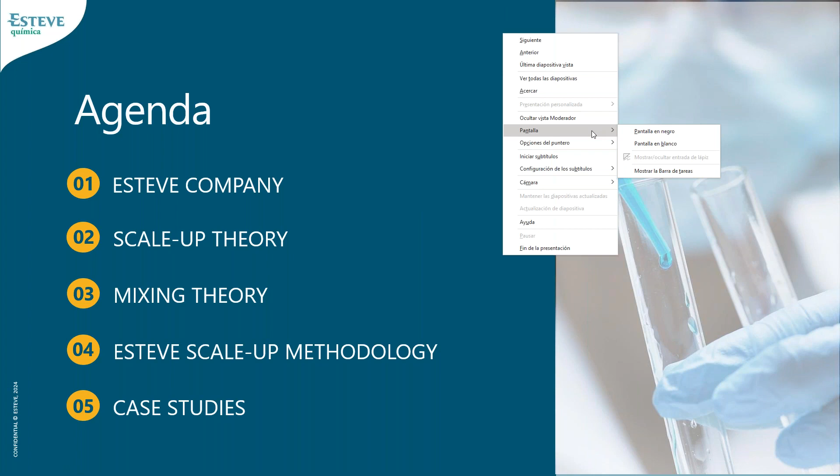Well, the agenda we will follow today is this one. I will start talking about the Esteve company, to then give you some details of scale-up theory, but focusing more in mixing theory, to then present the scale-up methodology that we follow in Esteve, and some case studies to finish this session.

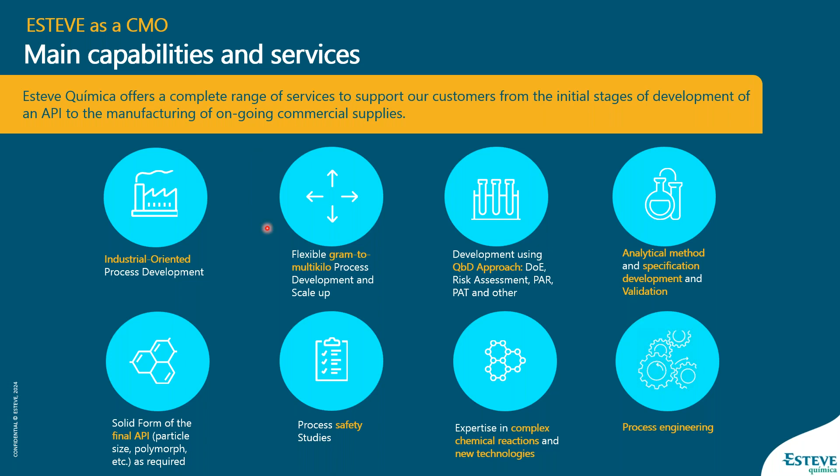So Esteve company was founded in 1929, and it's an international company based in Barcelona. It has two main groups, which is Esteve Pharma and Esteve CMO. I'm involved in the CMO sector, so today we'll talk about this sector, which is focused on the production of active pharmaceutical ingredients. So we support our customers from initial stage of development until the final commercial production. We have different capabilities and services, but today we'll focus on process engineering.

We have the headquarters located in Barcelona and also the R&D facilities. And then we have five production plants around the world, 3 in Catalonia, Spain, 1 in Mexico, and the other in China. With a total number of reactors around 250, which gives us a total reaction volume around 1,000 cubic meters, distributed in the 5 plants.

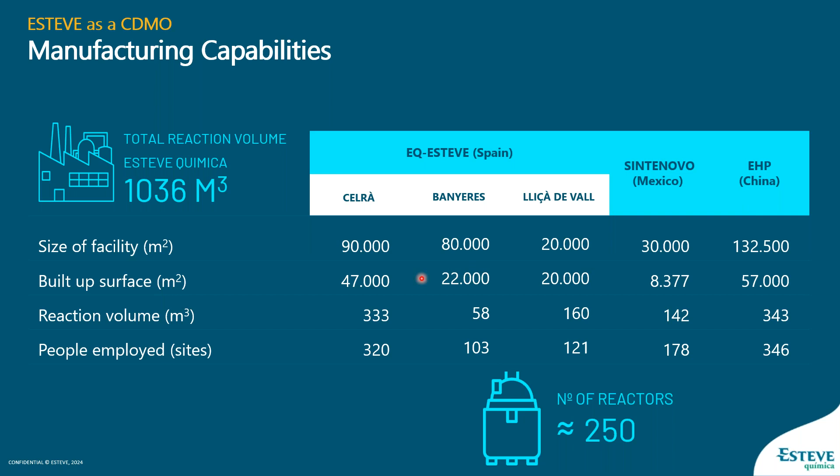And having this picture, I move to the scale-up theory, but keeping the same picture of the reaction volume and the number of reactors, because as a CMO, we require multipurpose plants in order to fit all these different projects that we have at the same time, and each project may be in a different stage in terms of quantities, but also in different stages of the clinical and chemical development, different chemical requirements in terms of the reactor specifications. And this leads to a very difficult plant schedule. And the big problem here is that this plant schedule is being constantly updated due to projects unexpected events, and one delay of one project usually impacts other project schedules.

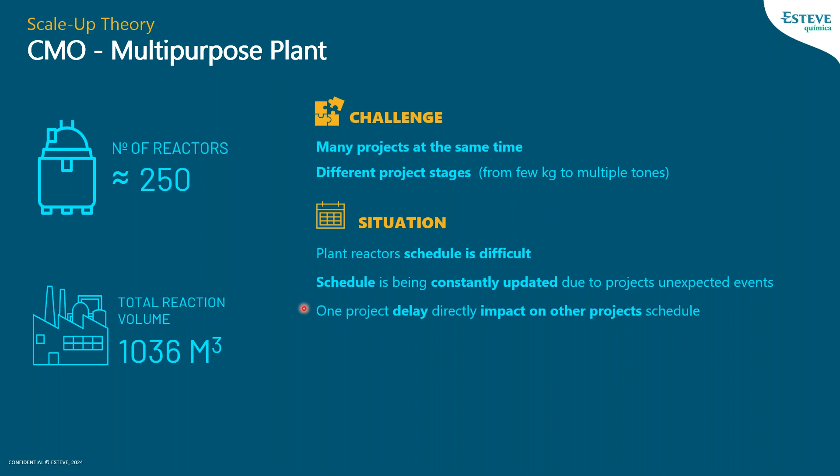So here, it's very important to reduce this risk of unexpected events. Some of them cannot be avoided, such as a delay on the raw material supply or a customer decision, but there's a window of opportunity when we talk about the scale-up. So if we ensure that our process has a right first-time scale-up from lab to plant, but also tech transfer between plants, we would avoid these process delays and also reduce the risk of a scale-up failure in terms of cost and time. And also, if we could ensure that our process can fit in as many reactors as possible, we would have more flexible processes that could fit in different reactors and be more flexible against these project unexpected events that change our schedule.

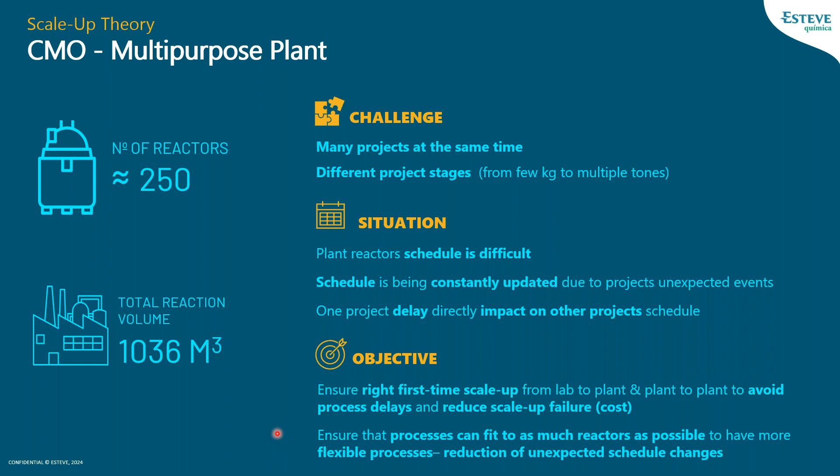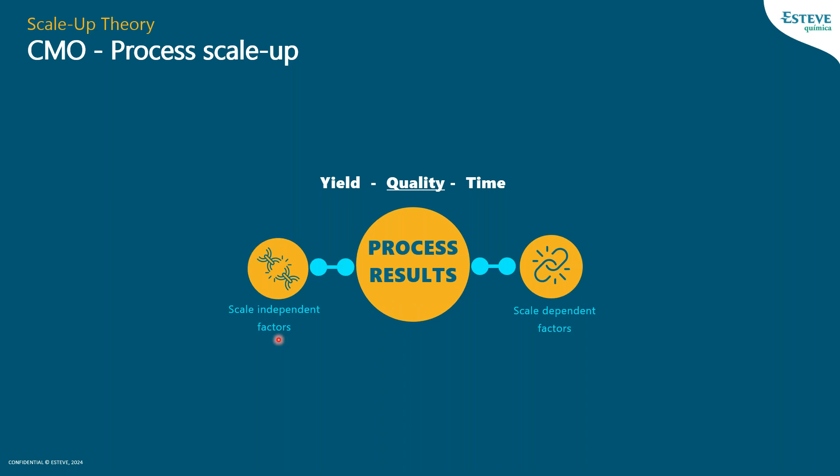As a CMO inside the pharma industry, obviously we are focused on quality as a process result, but also on yield and process cycle time. And to achieve these process results, we have to be aware of scale-independent factors and scale-dependent factors. The first one, we usually deal with projects that have been developed for several years in terms of chemistry, so here the kinetics, the compound properties, the different equilibriums have been well studied. On the other hand, we have the scale-dependent factors, which relate to mixing and heat transfer as the main parameters, but others, such as filtration and drying, are also important because the equipment that we use at industrial scale is very different with respect to the laboratory scale.

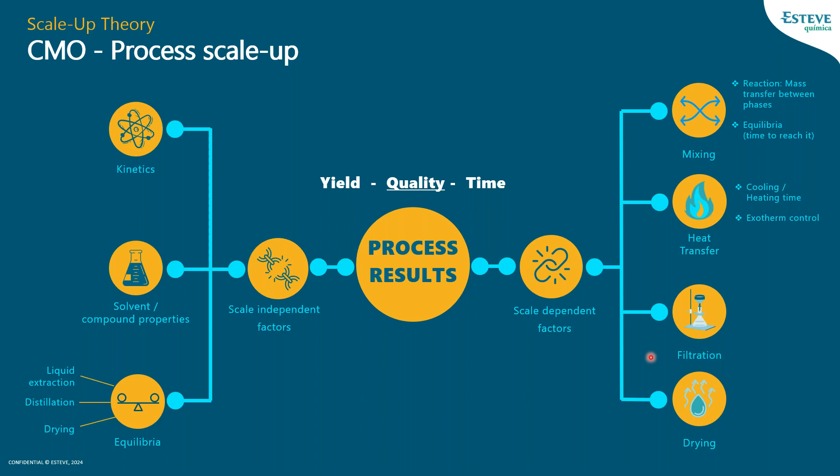When we deal with these projects in a CMO, the scale-independent factor, as said, we usually have a lot of previous development, so we have a lot of information, and yes, we adjust the process, but we usually do few chemical changes in order to adapt the process to the plant or to increase yield.

But in terms of scale-dependent factors, we have less information about possible antecedents in terms of industrial batches, and also low information about the scale-up factors. So this gives the picture that in a CMO business, when dealing with chemically developed processes, the process results may depend rather on scale-dependent factors than independent factors. I'm not saying that the scale-independent factors are not important, because we have to be aware that they are the driving force of all our process results, but usually we have less information about these scale-dependent factors.

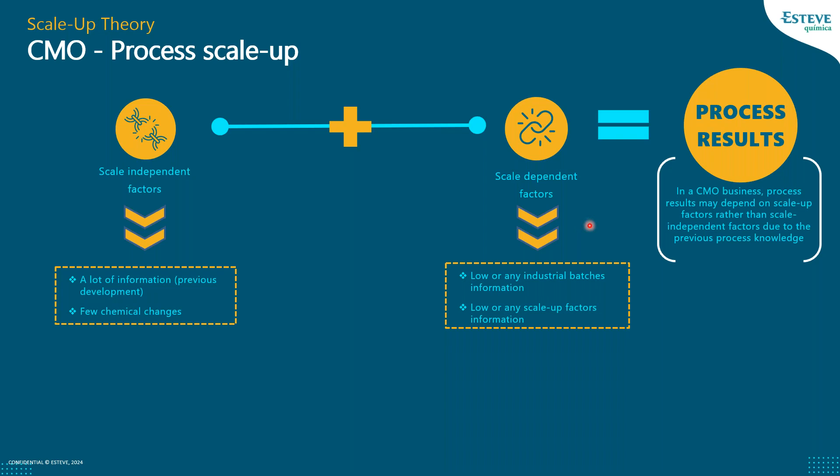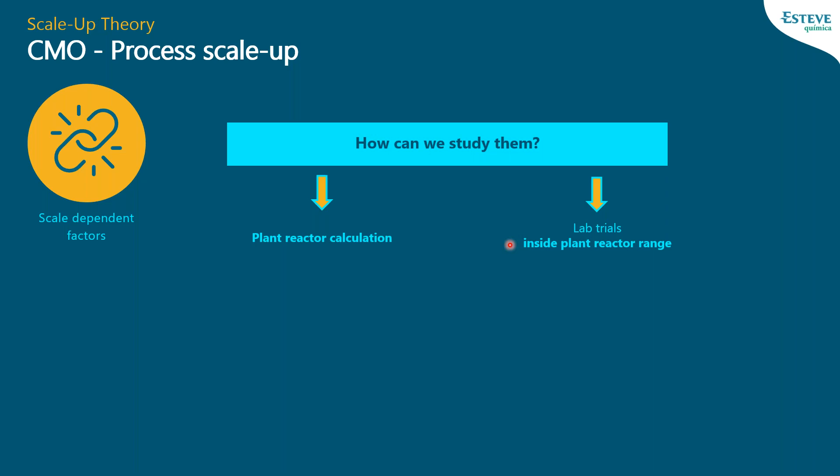So how can we study these scale-dependent factors? First of all, we should think about our plant vessels and have the calculations of our plant reactor, and then perform our laboratory trials in R&D inside these plant reactor ranges. This is commonly called the scale-down strategy, which I'll focus on later. This is usually applied to mixing operations involving heterogeneous phases, or heat transfer when dealing with high exothermic reactions.

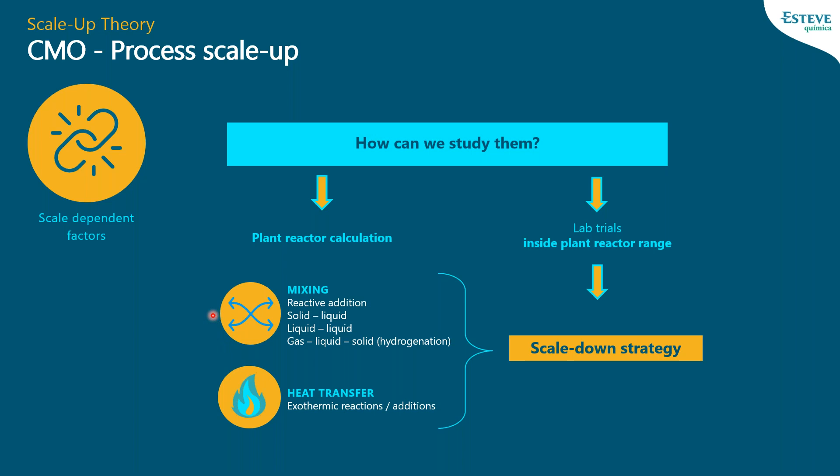In the session today we'll focus on mixing, so now I start the mixing theory part.

Because many times we hear that some reaction requires good mixing, or some crystallization does. Well, it could be to reach a turbulent regime, a fast components homogenization as high as possible. And here the point is that there's no general and good answer for this question, because a good mixing is impossible to define without the proper context.

As an example, imagine you are trying to dissolve some sugar in water using a spoon, and this would be a good mixing system to dissolve the sugar. But if you try to do mashed potatoes with the same spoon, you would probably not achieve the targeted results. So it's very important to know the purpose.

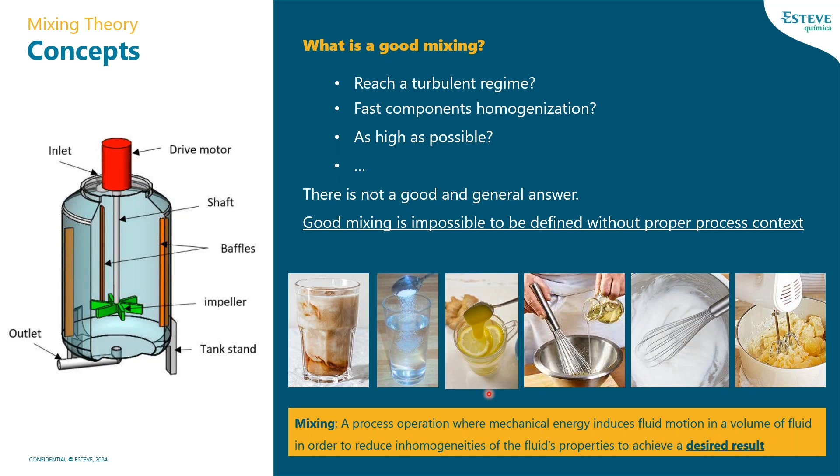Here I mention one of the multiple mixing definitions in the literature, but I like this one because it's the mechanical energy that induces fluid motion in a volume in order to reduce inhomogeneities, but to achieve the desired process result. And this is very important.

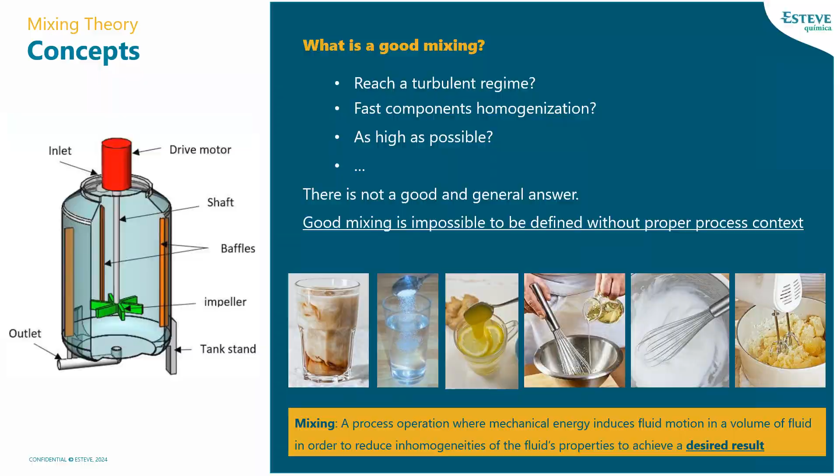So this mechanical energy that we are inducing, where does it go? It could go to flow or to shear.

Two more examples: for high flow impellers, we could imagine the propeller of a motorboat, where what you want is to generate as much flow as possible in order to induce the boat's motion. But on the other hand, in a kitchen blender, what you want is to cut the fruit or the food inside, so you require high shear, and you don't really want very good flow.

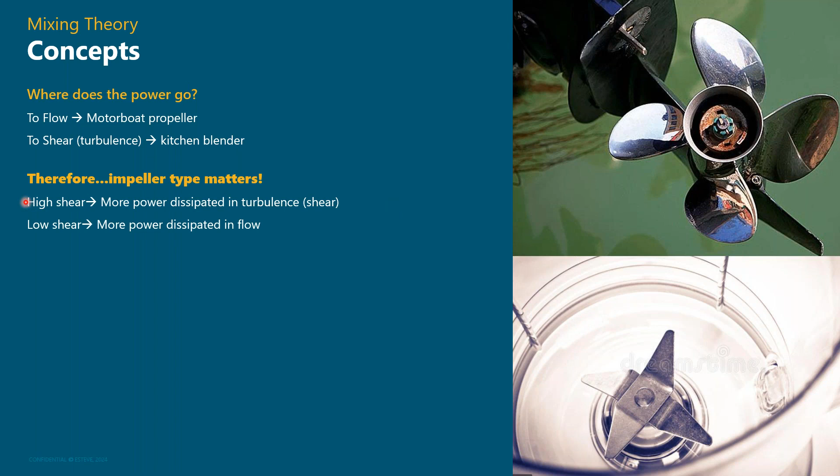So in our industry, the same happens with our impellers. There are high shear impellers and low shear impellers. High shear impellers are more suitable, for example, for hydrogenations, when you want to split the hydrogen bubbles into smaller bubbles in order to increase the mass transfer between gas phase and liquid phase. And low shear impellers are very suitable for crystallizations, when you want to avoid crystal damage, which could reduce your final particle size.

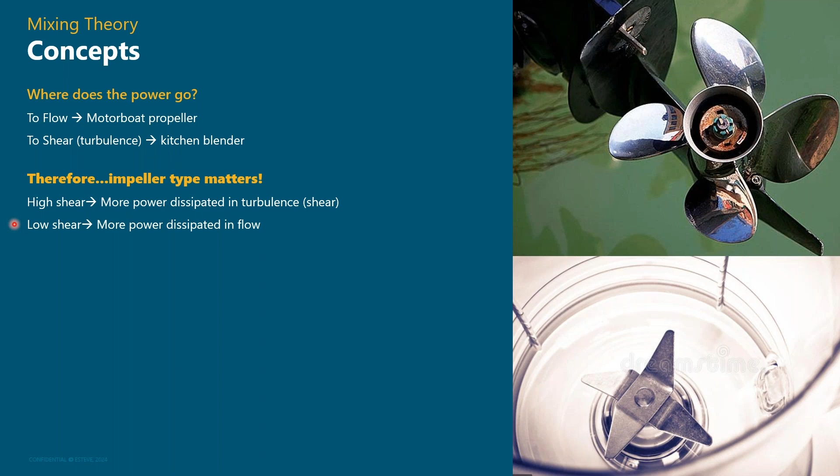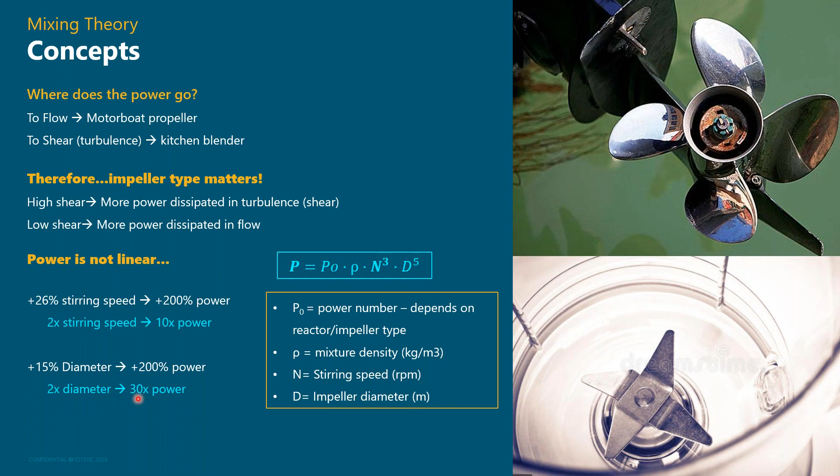So it means that if you double the stirring speed, you are really introducing 10 times more power into the system. And if you double the impeller diameter, you are introducing 30 times more power. This is not obvious when we talk about the stirring speed, but in fact, it's the only variable that we have.

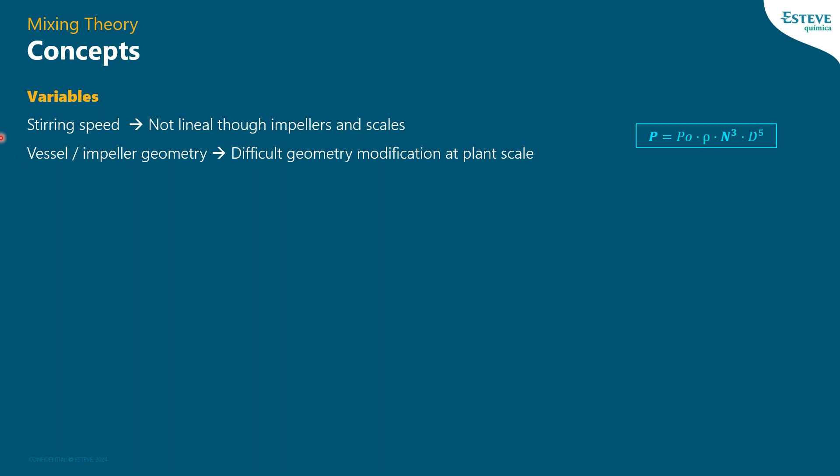The problem is that we have to think it's not linear through impellers and scales. The other variable we could modify is the geometry, but in our plants, these multi-purpose plants, it's very difficult to change the geometry. So I would say we only have this parameter.

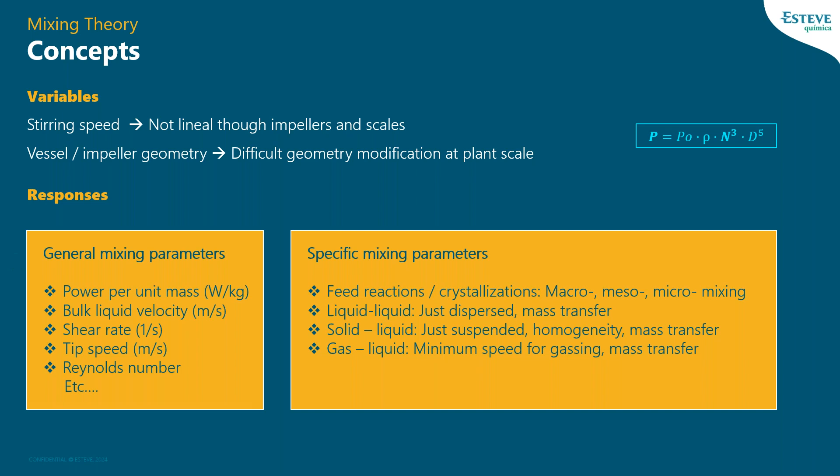In terms of mixing outcomes, we can think of many different mixing outcomes. There are multiple mixing parameters to be calculated, and it's impossible to hold them all constant if you only have stirring speed as a variable. So it's required to identify the key mixing parameter and hold it constant. It's important to mention that the key parameter is the most influencing process parameter, but probably not the only one, so you have to be aware of the non-key mixing parameters also.

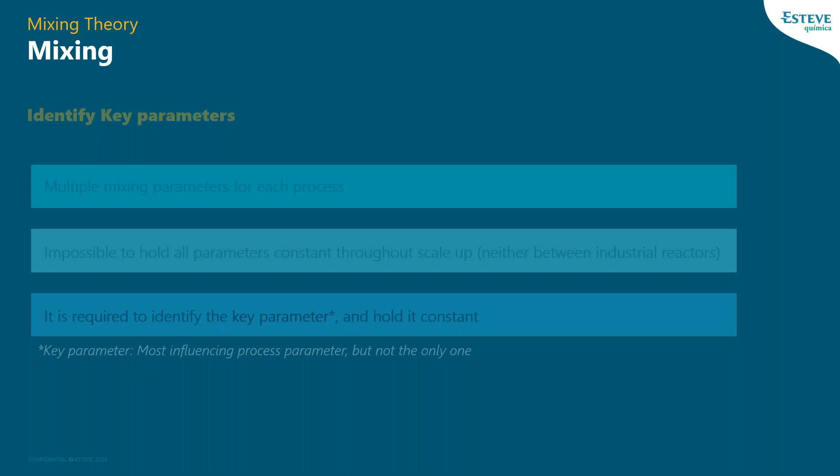To perform these calculations, you could find different commercial packages. Here we use VisiMix Turbulent software, which allows us to compare different geometries and reactors.

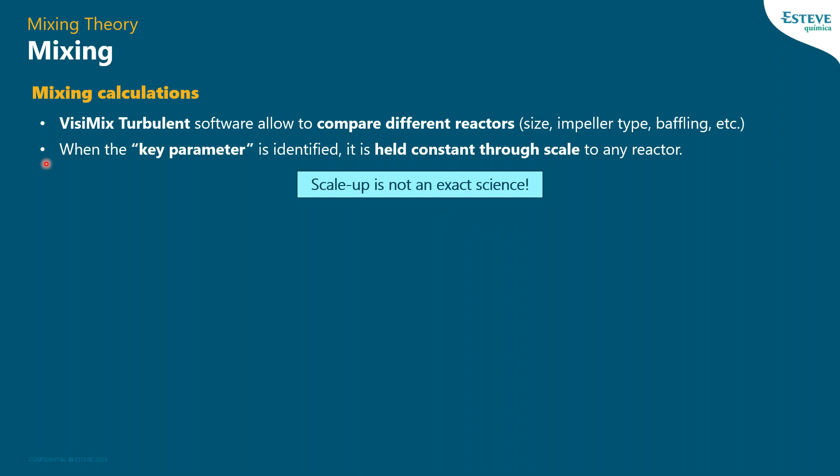Once we identify this key mixing parameter, we hold it constant through scales. However, scale-up is not an exact science, and I want you to be aware that if you maintain similar geometry between the reactors you are comparing, usually between lab and plant, you would reduce scale-up errors. That's because if we have different geometry and hold only one parameter constant, the other parameters would be much more different if we do not hold this geometry. Also, softwares may perform different approaches based on geometry, so you may be calling different formulas depending on geometry, with different errors. And finally, the flow pattern is strongly dependent on the geometry.

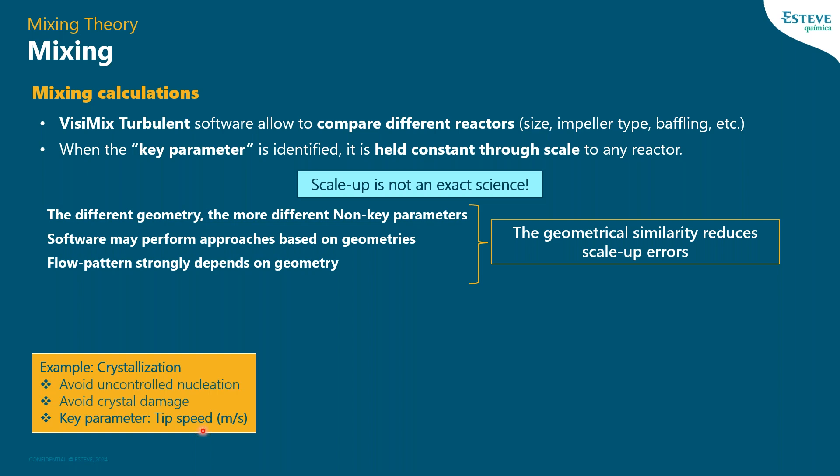As an example, imagine a crystallization where you want to avoid uncontrolled nucleation and crystal damage, and you focus on the key mixing parameter as the tip speed, the velocity of the blade at the tip of the impeller. Here we have two systems with the same tip speed, the same vessel, the same impeller, and the same stirring speed. The only difference is the presence of baffles.

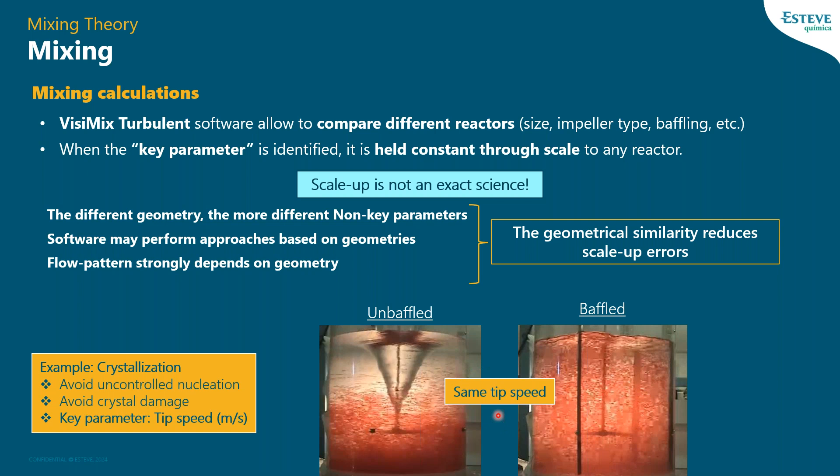So now I will focus on the Esteve scale-up methodology. First, I will talk about the scale-down strategy, which is a common strategy applied in our industry, focused on our targeted plant reactor. What we have to do is translate the stirring speed range of this reactor into a key mixing parameter range. Having this, we would have parameters that are scale-independent and comparable between scales.

So we could go to laboratory scale and perform scale-down trials, mimicking the key mixing parameter of the plant, and if possible, I recommend having similar reactor geometry also. Once you do this trial at laboratory scale, if you have the expected outcomes, the process could be scaled up. If not, you should explore other mixing ranges inside the same reactor, change the reactor, modify chemistry, or even accept that the process outcomes will be slightly different.

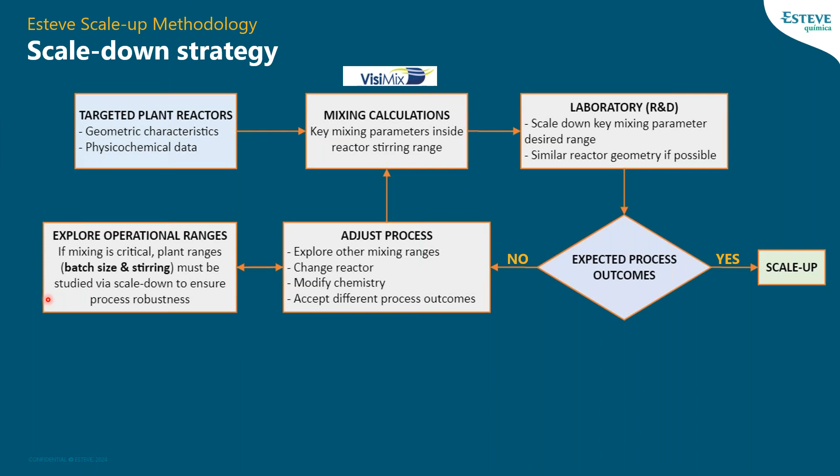It's important that once you find mixing is critical, it's a very good practice to ensure operational ranges in terms of batch size and stirring speed. You should limit the batch size, related to filling volume, and the stirring speed, in order to ensure your process outcomes in this mixing space would be robust.

This process usually implies many mixing calculations for each unit operation and for each possible plant reactor. Here we use the target reactors, but we also include reactor equivalents in order to be more flexible. We perform 5 to 10 mixing calculations for each reactor, and the same for the scale-down trials, in order to screen stirring speed but also reactor geometry. So if each project has multiple steps, and each step has multiple unit operations, you can imagine you can deal with a high number of calculations.

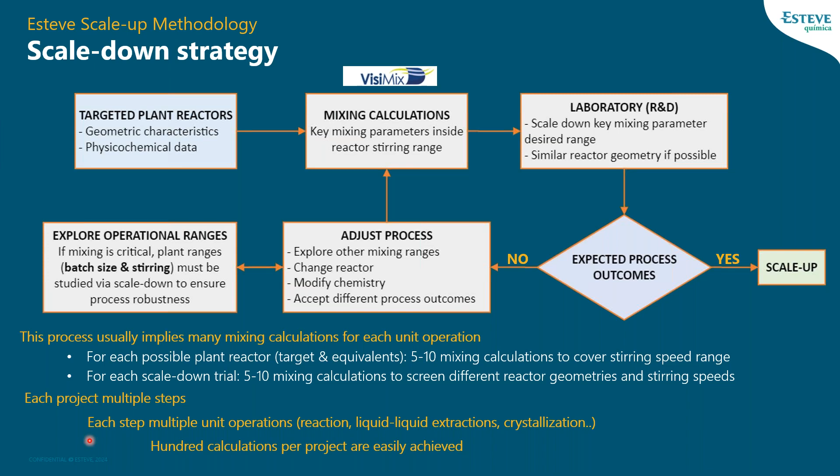So you require a tool to perform mixing calculations that would be fast enough to resolve this number of calculations.

As said, we use VisiMix, but why do we use VisiMix?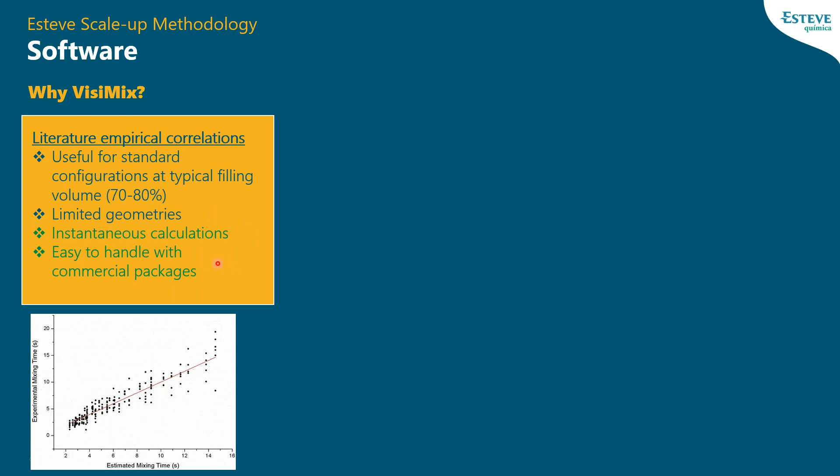I'll first explain the typical historical approach: literature empirical correlations, where equations try to model or regress experimental data into a formula. The main problem is that the experimental data available in the literature is usually for standard configurations and typical filling volume, around 75%. So we have limitations in geometries, but the good point is that calculations are very fast and easy to handle with commercial packages that integrate this literature data.

On the other hand, we have CFD models, computational fluid dynamics, which are high fidelity models of any reactor geometry. The drawback is that calculations are longer, around 6 hours depending on the calculation and the machine, and it probably requires some expertise in the field. So for our CMO daily work, it's not suitable, but it's very useful for specific cases.

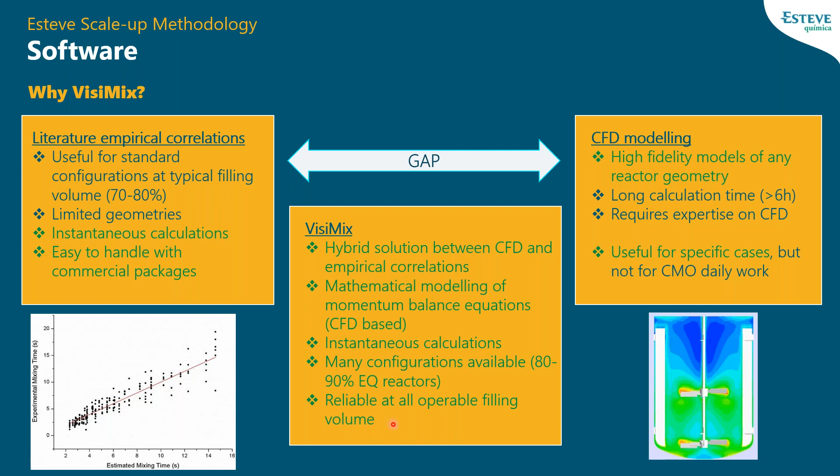So there was a gap, and VisiMix solver, at least for us, has a very smart solution: a hybrid between CFD and empirical data. They generated a lot of experimental data based on different vessels, baffles, and impellers, and also performed numerical calculations to solve momentum balance equations, the fundamentals of mixing. They integrated both scenarios into mathematical modeling to perform instant calculations, which is very interesting. In our case, they cover many of our configurations, and we can calculate at all the operable filling volume.

To finish with this scale-up methodology, the third point is geometrical similarity. Here we have examples of our plant vessels. We can see the baffles, which differ between vessels, and different kinds of impellers. One of the big challenges was that at laboratory scale we don't usually have baffles, nor these kinds of different impellers.

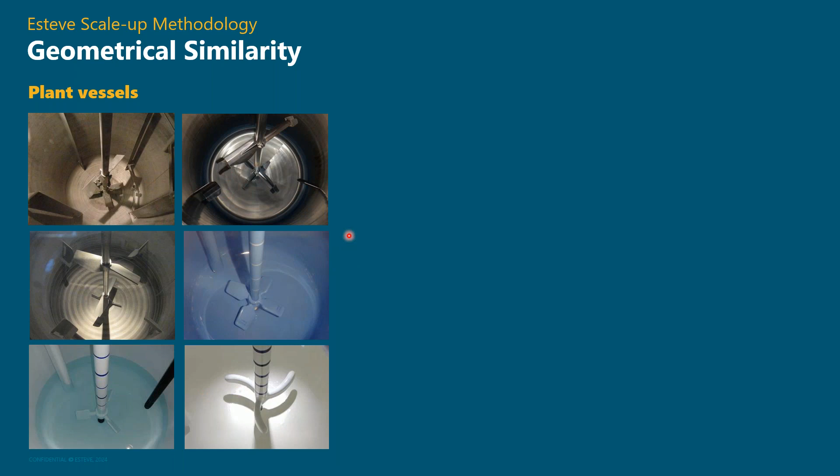So we proposed to generate self-designed R&D equipment to mimic our plant vessels, both impellers and baffles. For kilolab scale, we used this set of impellers and these flat baffles. At a smaller scale, we reduced the number of impellers to high shear and medium shear impellers, but kept the presence of baffles.

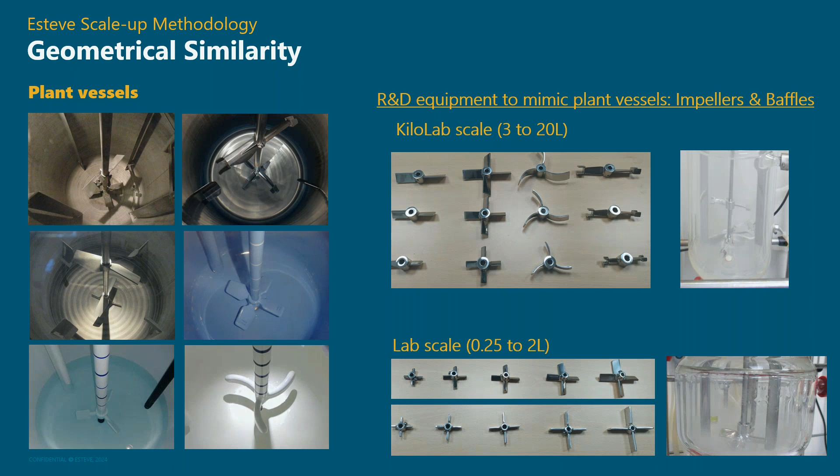To summarize this strategy: we have a systematic methodology, the scale-down strategy; an appropriate tool for our facilities, the VisiMix software; and appropriate R&D equipment to ensure geometrical similarity, which reduces scale-up errors.

Now we enter the last part of this session, and I will present three case studies: one related to liquid extraction, another for solid-liquid reaction, and to finish, reactive crystallization. Those are the key mixing parameters I will focus on.

It's important to mention that it's all related to energy dissipation or shear rate. Obviously, when dealing with two immiscible liquids, we adjust the speed to have good dispersion. And when dealing with solids, we adjust the speed to keep them suspended and avoid solids settling at the bottom of the reactor.

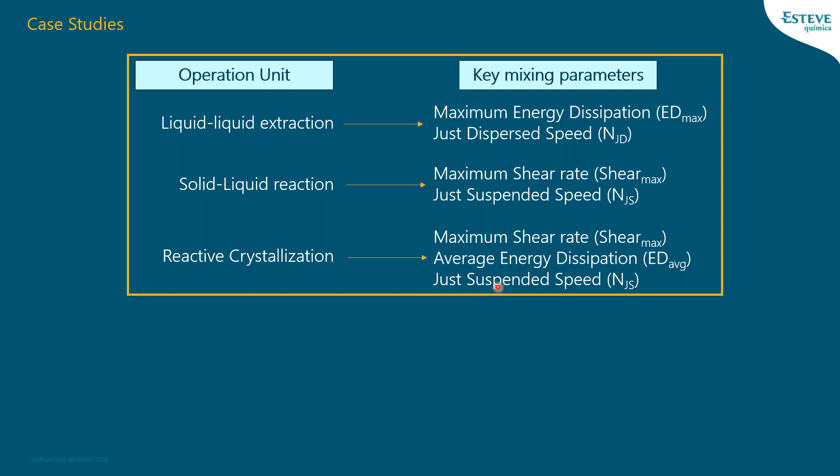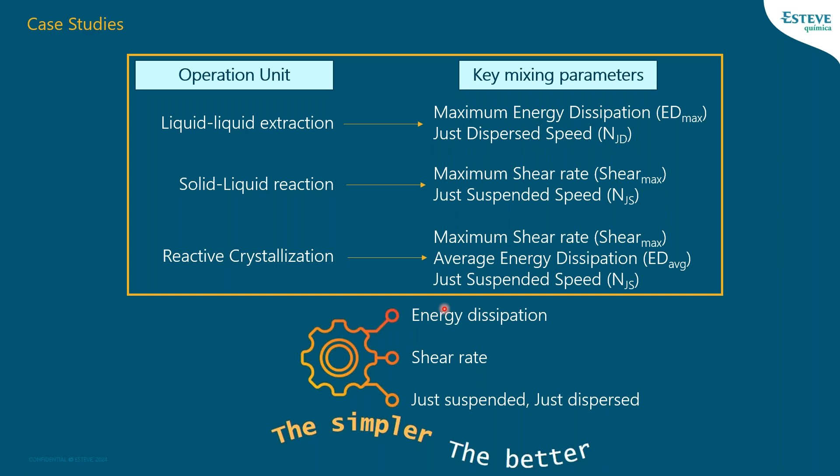But why focus on these and not all the other mixing parameters? Because my experience led me to think the simpler the better, and energy dissipation and shear rate are like the raw mixing parameters that then propagate to other mixing parameters that can be calculated. So I usually focus on that in different parts of the vessel.

We start with liquid extraction, an already validated process for our customer, a tech transfer. The customer reported that citric acid extraction can have the capacity to emulsify. After a reaction, the organic phase reaction mixture was mixed with aqueous citric acid to purge some impurities of the process. If you overmix these two phases, they can emulsify.

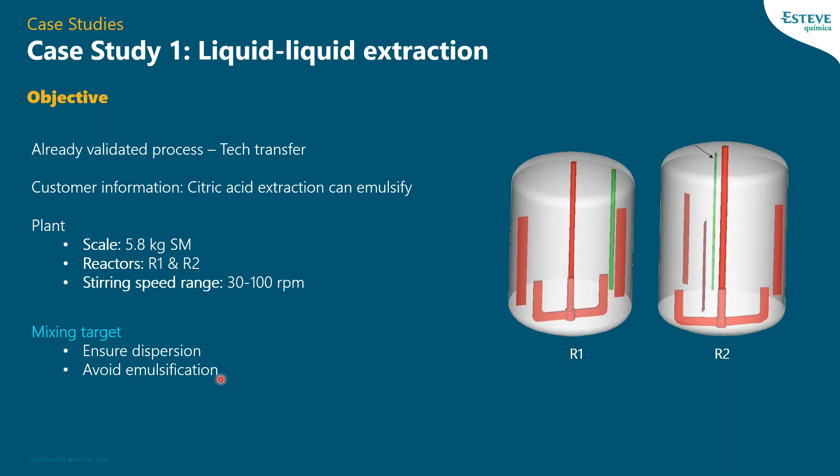When dealing with ensuring dispersion, what we usually have to do is calculate the minimum average energy dissipation or power per unit mass in order to disperse. And to do so, we usually have empirical correlations to calculate this minimum speed, but then we check it experimentally.

So here you have an example where you are rising the stirring speed and you are able to disperse phases. And in terms of...

Emulsification: here we have two pictures to exemplify what I'm referring to as an emulsion. The same system, on one side very clear phases with neat separation; however, on the right hand, the aqueous bottom phase is emulsified because there are small drops of organic layer here. So you can imagine that if the product is in the organic layer, and you go downstream with this process and discard all this aqueous bottom layer, you would have a yield detriment because there's a lot of organic phase.

I focus on maximum energy dissipation because at the end it's related to the drop size. Maximum energy dissipation is found near the impeller blade, so the drops of the dispersed phase are split into smaller and smaller drops. If you generate too many small drops, that's when you have the risk of emulsion.

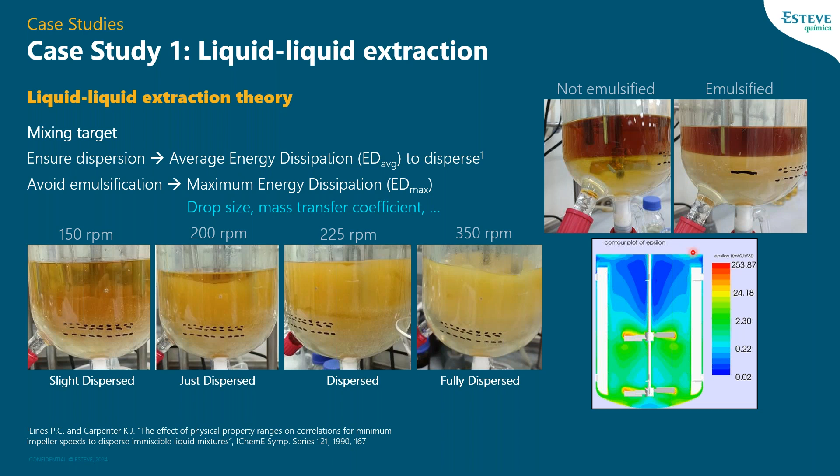Going back to the case study, what we first did is the plant calculation. Both reactors' stirring speed ranges were translated into both key mixing parameters, and the just-dispersed speed by empirical correlation was found to be 0.05. So we should limit our first reactor to 35 RPMs.

In the case of the upper part of the range, obviously we could go up to 100 RPMs, but as we knew that this system could emulsify, we preferred to limit it to 75 RPMs. Having this range, we have to focus on which is the maximum value of this maximum energy dissipation, and it was 54 watts per kilo, which should be scaled down.

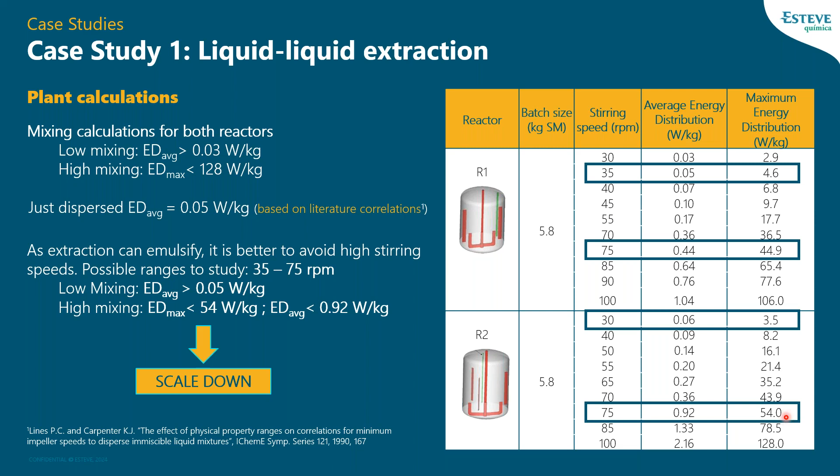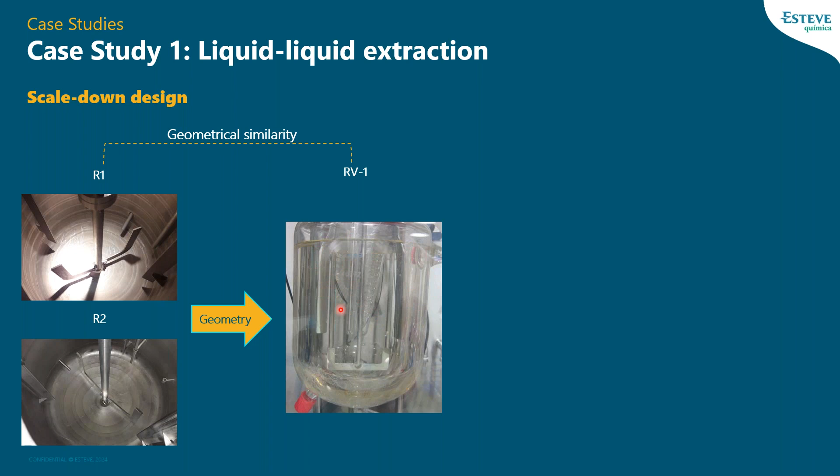To design this scale down, first of all we ensured the geometrical similarity, and we performed the scale down trials in a 1 liter reactor provided with 3 flat baffles and an anchor impeller. We calculated that 350 RPMs would be equivalent, more or less, to the maximum value of energy dissipation.

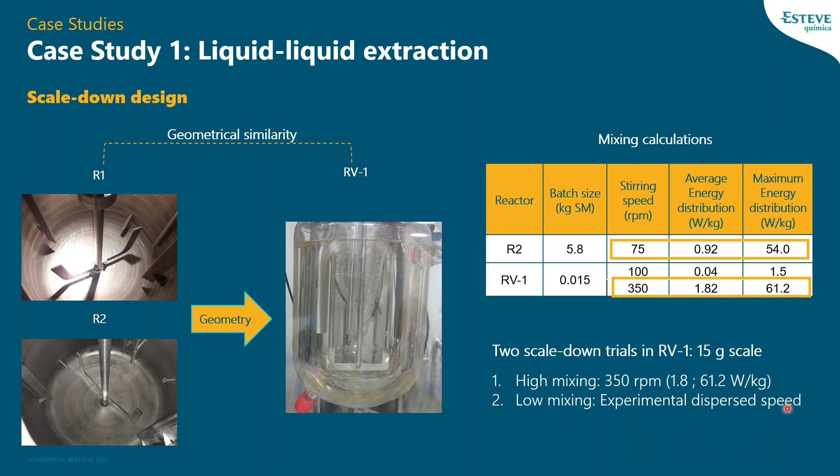On the other hand, we also proposed a low stirring speed trial that would be at the experimental dispersed speed, which, based on correlation, should be around 100 RPMs.

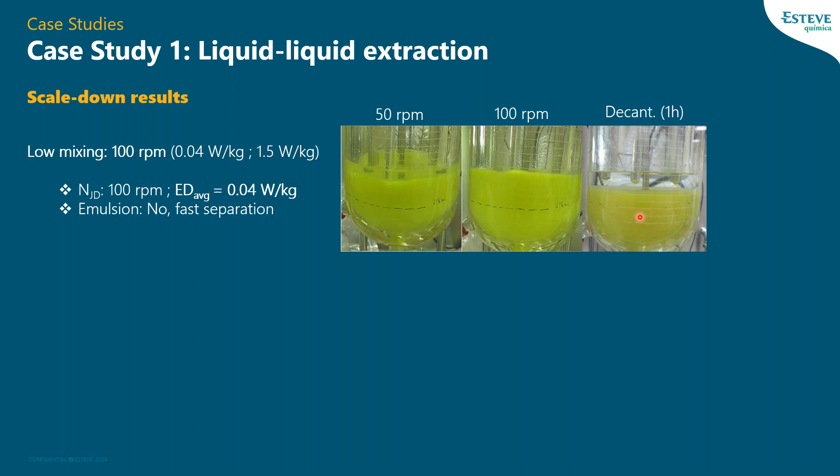We started with this low mixing trial, and we proved that 100 RPMs were enough to disperse phases. Once we stop agitation, we see a clear separation. Here you can see that this phase is not clear, but it was reported like that, so it was the expected outcome. What we want to see is this upper clear phase.

Once we performed the high stirring speed trial, we saw the opposite behavior. After stopping agitation, what we could observe is that we require 3 hours until we achieve this clear separation.

Both trials went ahead with the downstream processes and were isolated. So we obtained the final API, and we corroborated that they have the same API quality and yield. So at the end, it was only a matter of time, and between 1 and 3 hours we do not think that it's critical.

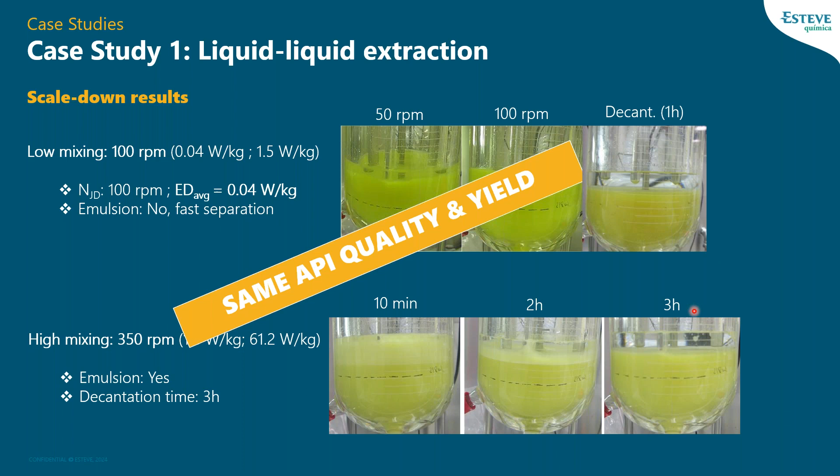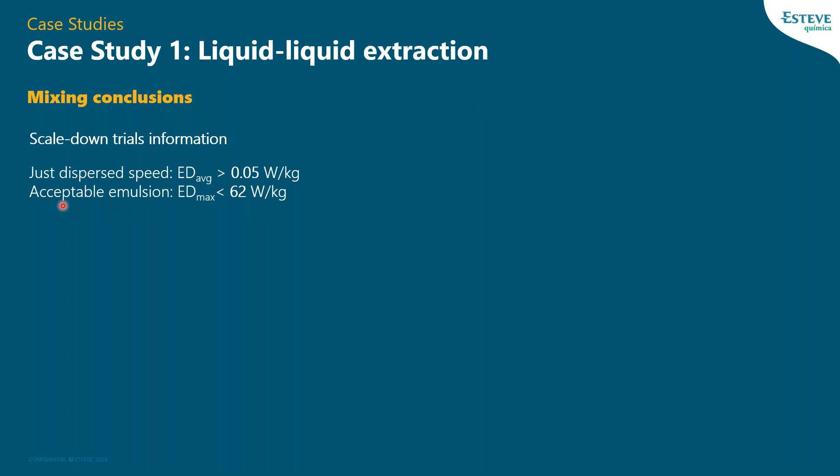So we take advantage of these scale down trials to limit mixing in order to disperse phases, but have an acceptable emulsion. We translate this data into the targeted reactors, proposing the stirring speed ranges, and we finally validate this process at the first reactor in the targeted stirring speed without observing emulsions.

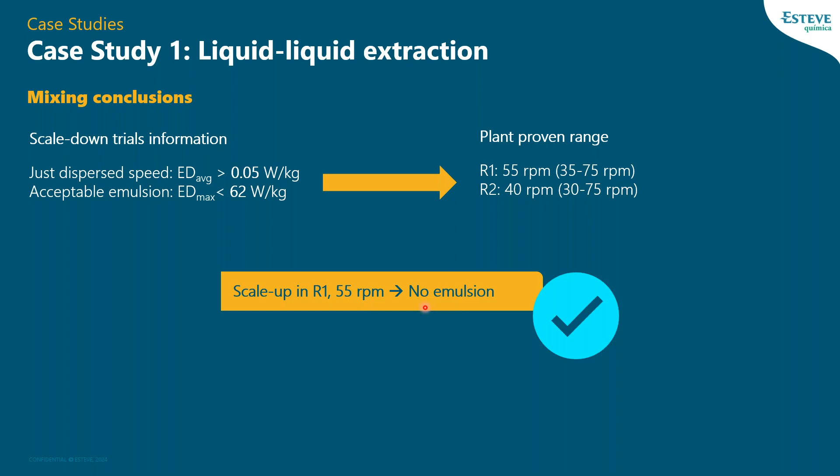The second case study is a solid liquid reaction. The solid phase is aluminum chloride, which was transferred with a pre-mixing stage, where the aluminum chloride is mixed with the solvent during 3 hours in order to reduce the particle size, because this aluminum chloride was granulated with a big particle size.

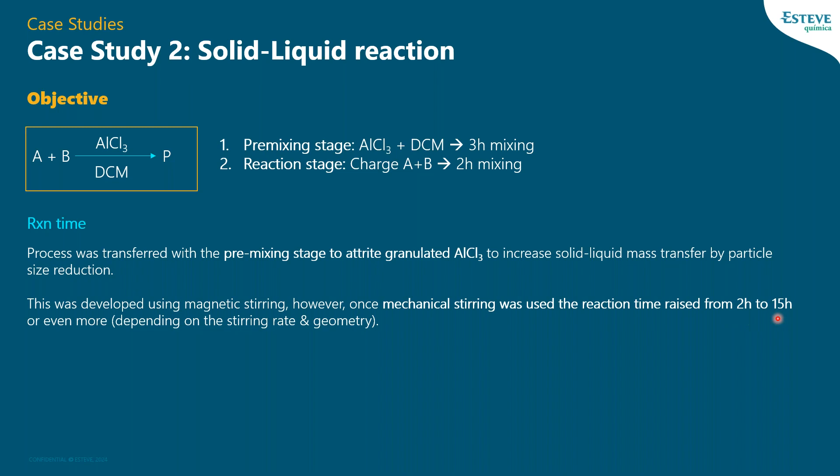After this pre-mixing stage, we charge both reagents, and after 2 hours the reaction was expected to be complete. The problem here is that this was developed using magnetic stirring, and once we checked mechanical stirring, the reaction time rose from 2 hours to 15 hours or even more, depending on the geometry.

So here the point was that particle breakage, when you use magnetic stirring, is very effective because there's constant friction between the stirring bar and the bottom of the reactor, so you're doing like a milling effect. But once you move to a stirred vessel, the impeller shear rate is the main cause of particle breakage, but it's not usually as effective as the direct friction.

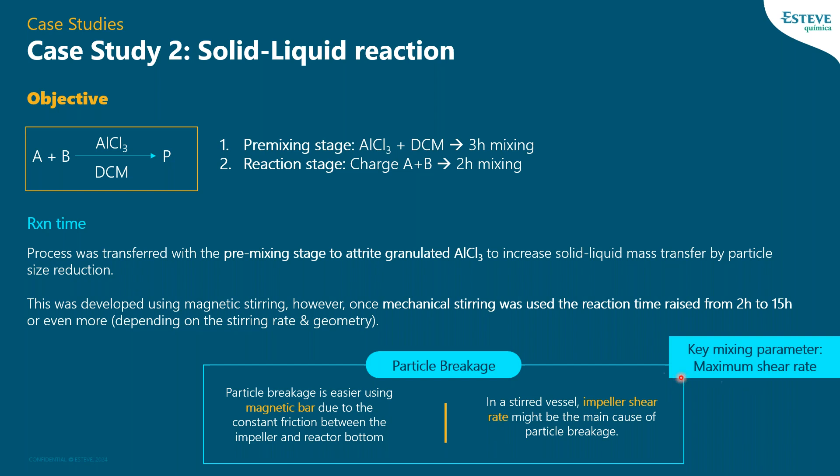So the key mixing parameter here was very clear, which was the maximum shear rate. The first point was to perform mixing calculations in order to figure out what was the mixing at the targeted plant reactor, but also in this reactor that lasted more than expected.

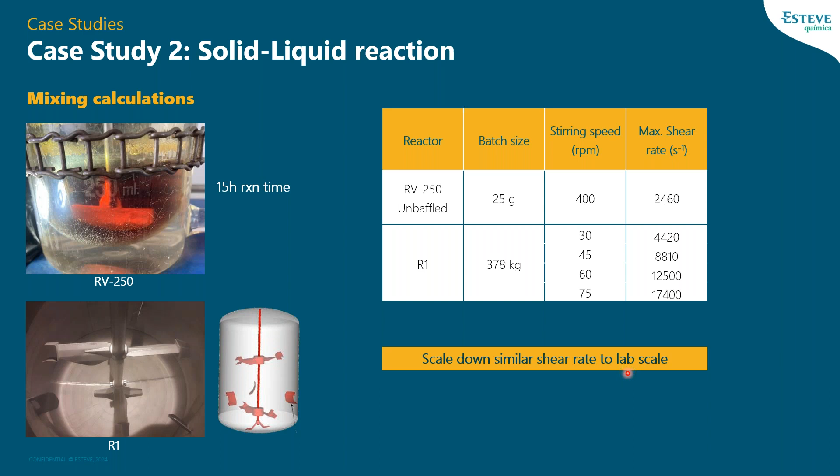We find that the shear rate at plant scale would be much higher than laboratory scale. So if we should scale up this, we would target this higher part of the range. So we should scale down to similar shear rate at lab scale in order to prove what happens with this reaction time.

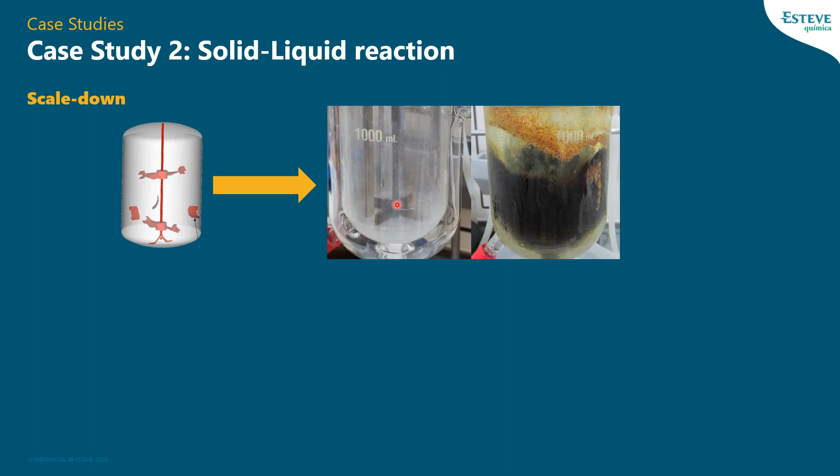The system that we proposed was a 1 liter reactor provided with high shear impeller and flat baffles. We calculated that if we mix at 550 RPMs or 700, we would be targeting this higher part of the range. We performed these experiments, achieving 2 hours of reaction time. From these experiments, we could extract that if we ensure a maximum shear rate above 11,000, we would probably achieve these 2 hours of reaction time.

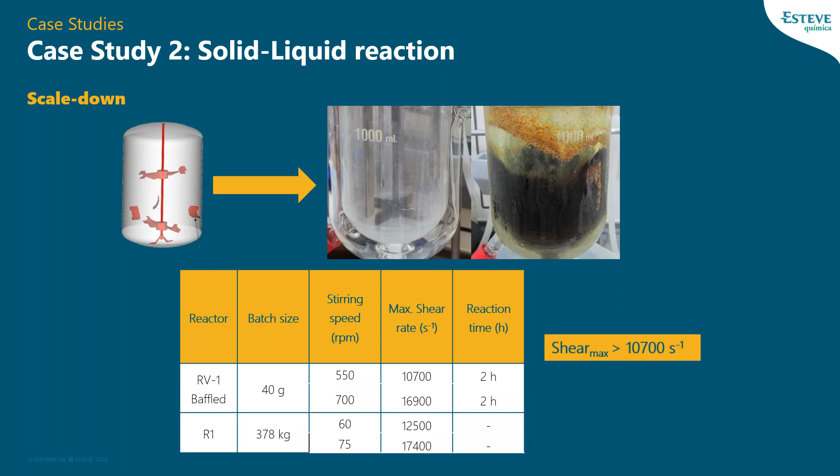The validation batch size range that we were targeting was this one. So we should check that in the whole validation range we have this 11,000, and it was checked. We have been performing this process multiple times, and we have screened all these batch sizes, achieving the desired reaction time, which was these 2 hours.

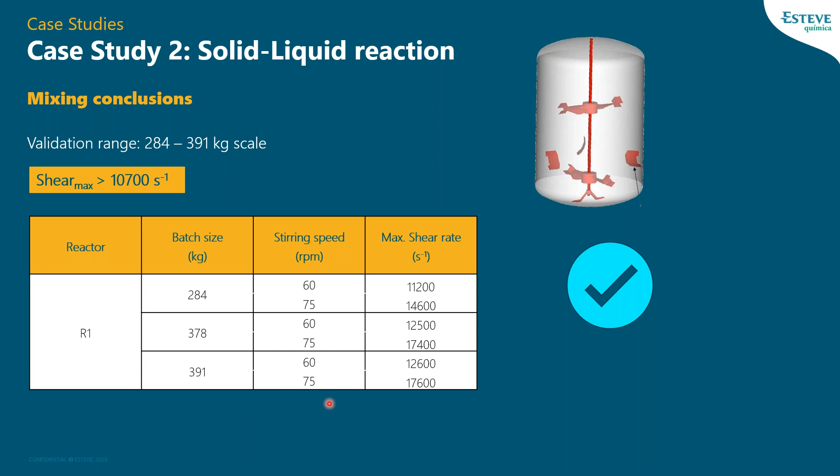Finally, the third case study is a reactive crystallization. In this case, it's a validated process also, but it's a tech transfer between two of our plants, the EHP plant in China and the Celrà plant. The process is that the free base API is transformed into the salt by sodium hydroxide addition with a controlled feed rate, and the PSD was targeting a D90 of 60-90 microns.

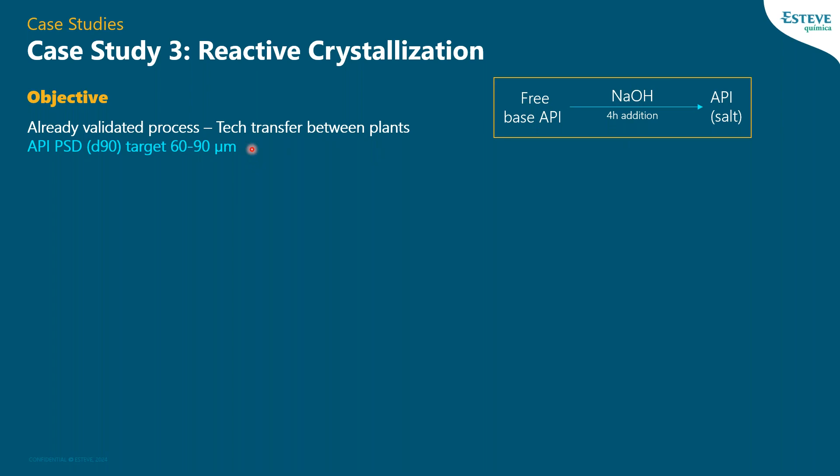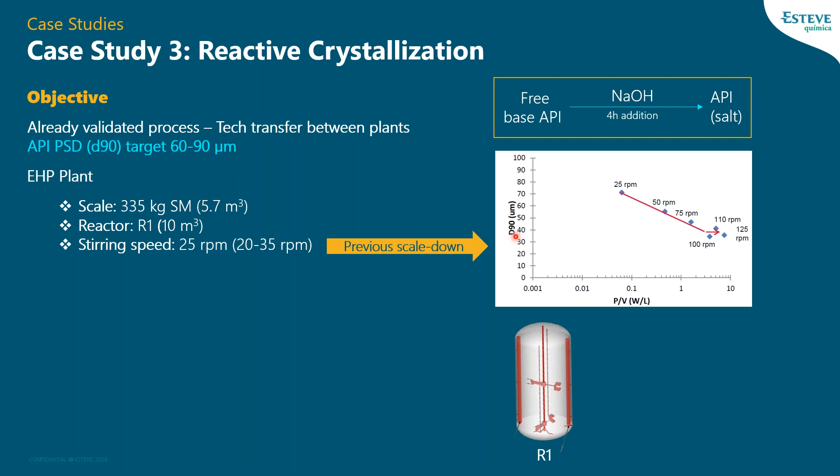It was reported that the average energy dissipation during this addition was directly related to the final particle size. This was the scale of the already validated reactor, which was stirred at low stirring speed, because previous scale down trials proved that if we introduce too much energy into the system, we could reduce too much our D90 target. So here the point was to reproduce this process in the Celrà plant reactor, which has a stirring speed between 20 and 50 RPMs.

So as a mixing target, we have to ensure suspension, but avoid uncontrolled nucleation that could reduce the particle size, but also crystal damage that could also reduce the particle size due to attrition.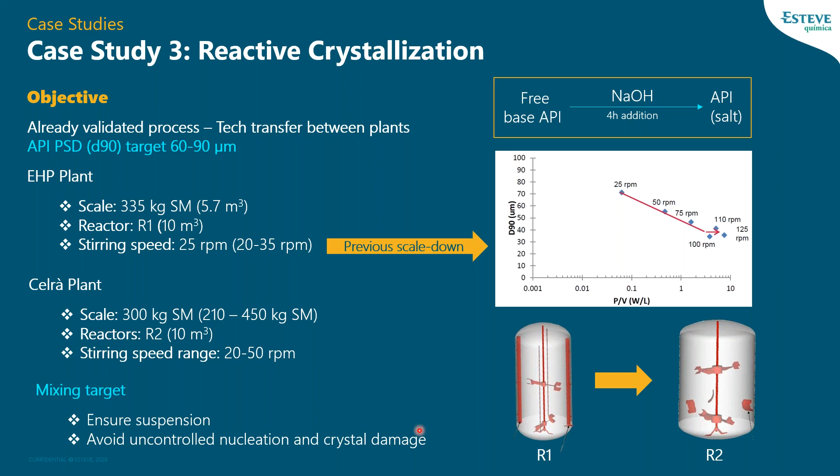First calculations about the proven stirring speed range in the EHP reactor were calculated in order to perform these both key mixing parameters. Once we checked all the validation batch size range, and in the lowest stirring speed available in our targeted reactor, we figured out that we should mix at the lowest part of the range, these 20 RPMs, in order to be equivalent to the 0.06 watts per kilogram.

But we also became aware that we have some points that were above the proven values. So we should perform some scale down trials in order to prove that these 0.22 watts per kilo were not reducing too much the PSD, and that this shear rate up to 3000 would not cause crystal damage.

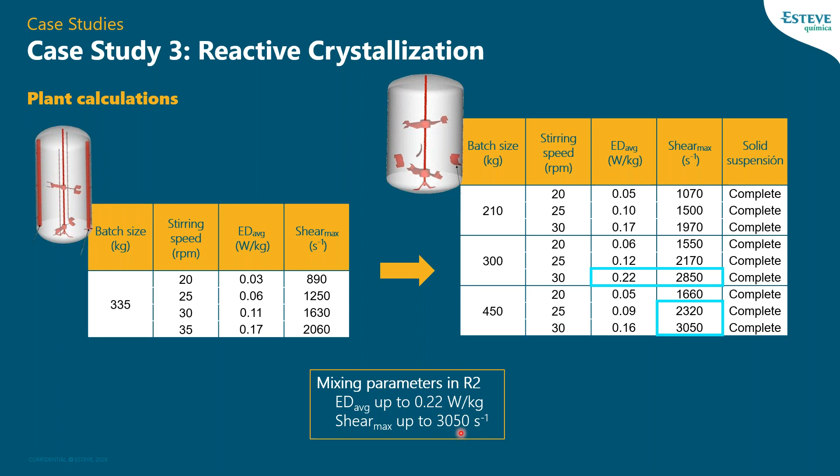That was the targeted reactor. So we scaled down the geometry to similar impeller and flat baffles, and we performed 2 experiments, one at the target, which was the lowest stirring speed, and the other at these 30 RPMs of the targeted reactor, which were achieving both key mixing parameters.

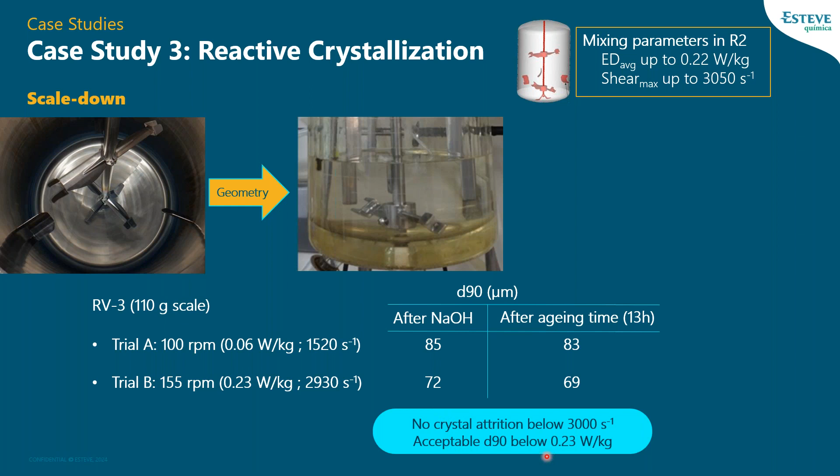We monitored the D90 in different parts of the process. After the sodium hydroxide addition, we checked that, as expected, we reduced PSD due to this higher energy input, but it was inside the specification we were targeting. After the cooling ramp and the aging time prior to filtration, we could not see significant particle size reduction. So we could say that no crystal attrition was happening below this 3000 shear rate, and that the D90 was okay at this power per unit mass.

So we scaled up this process and we proposed that for the whole batch size range, we should target the lowest part of the range, 20 RPMs, but with a certain margin of stirring speed.

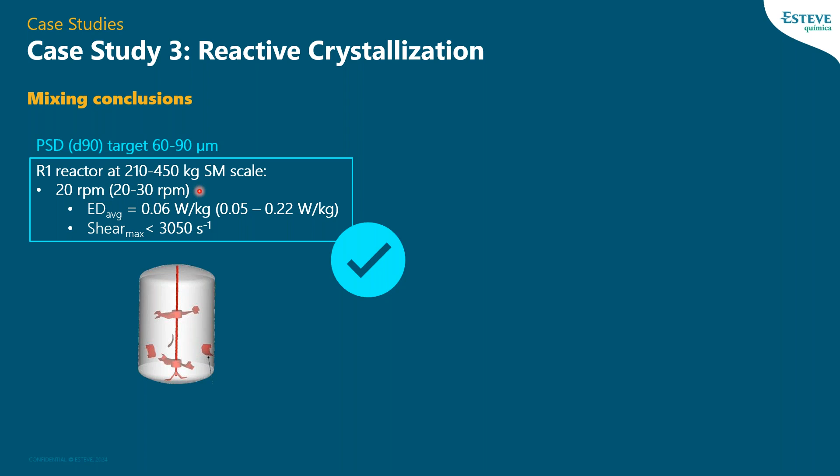To finish this talk, I would like to highlight some points. First of all, that the scale-up factors must be evaluated to ensure this right-first-time scale-up from lab to plant, but also between plants. And good mixing is meaningless without a process context.

There are multiple mixing parameters to be calculated, but only a few variables, or only one, which is stirring speed. So we should focus on the key mixing parameters, but without missing that non-key mixing parameters can also have some effect on the process.

VisiMix software is a powerful tool to accelerate mixing calculations, but using a fundamental approach. And finally, that if we ensure this geometrical similarity during the scale down trials, we would reduce these scale-up errors.

Thank you very much, it was really interesting to see all the explanations from the very starting point, structured well. From the explanation about your mission in the company and how it's connected to the fundamentals of technology and knowledge about the phenomena of mixing, and after that how to apply it in different kinds of examples, I enjoyed it a lot.